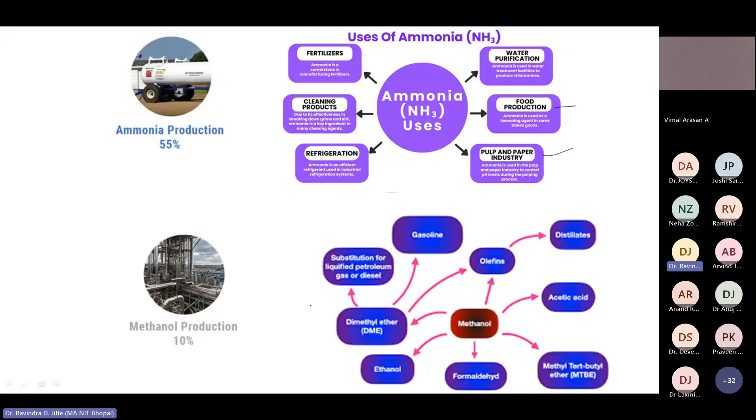The second 10% of hydrogen is also required for methanol, and methanol consumption includes producing acetic acids, distillates, ethanol, or DME, and so many other applications. This will just briefly give you the idea that there are requirements of hydrogen by industry, and industry is not a single industry like petroleum—it has got a wide variety of industries.

Now if we go through the present classification of hydrogen based on the way it gets produced—the majority of hydrogen which is at present required by industry, we call it gray hydrogen. It is produced by simply steam reforming of methane, which we call SMR. It is gray hydrogen, but at present we are fulfilling the need of the industry with it.

Maybe we are compromising on the pollution point of view, or the environmental damages occurring by gray hydrogen. But the demand is there, so we cannot stop the industrialization or the growth of civilization. So needs are there, and at present majority of the hydrogen comes from gray hydrogen.

If you look at the topic, this FDP is about green hydrogen, and that too should come from sustainable sources. So there has to be a clear picture about gray hydrogen, blue hydrogen, and green hydrogen.

In gray hydrogen, we take natural gas, or CH4, and carry out the reforming of CH4. Hydrogen can be produced, but at the cost of liberating CO2. If this liberated carbon dioxide is not captured or sequestered, then this is called gray hydrogen.

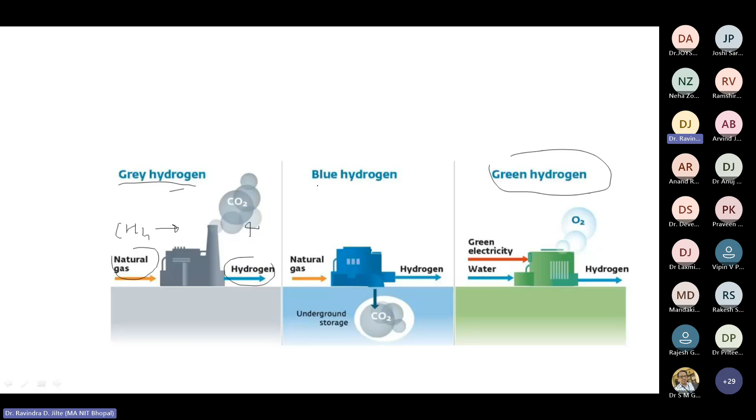Since there are international constraints, we have to follow certain conditions, like not liberating carbon dioxide to the atmosphere freely. So in a second approach, we still use reforming of CH4 to produce hydrogen, but we install carbon capture and storage methods in the plant. Once the carbon dioxide is captured, we store it in a place where it won't cause environmental damage.

In underground storage, under the sea or oceans, we have found abundant reservoirs, empty spaces where we can put this CO2. That is one way of doing it, and this is called blue hydrogen. But here, for converting natural gas to hydrogen, we require fossil fuel.

Now, if you try to replace this fossil fuel with renewable energy, it is called green hydrogen. In the case of green hydrogen, we carry out electrolysis of water, and once that is done, we get hydrogen, and as a byproduct, we get oxygen.

But electrolysis is an energy intensive process, requiring electricity. If this electricity can be provided in a sustainable or green way, for example using a PV plant to provide electricity, that concept is called green hydrogen.

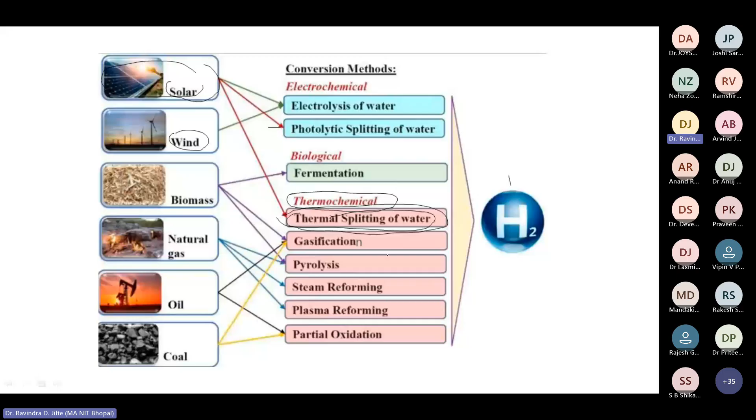Then the concept called solar fuels. Now solar fuels is basically, suppose the diesel is not available, or kerosene is not available, then how will you fly the aeroplane and carry out other activities? Can you produce the jet fuel artificially in the laboratory? That is what is happening over there, because many activities deal with the diesel engine, kerosene, petrol, or so many other things.

So what we try to do is, if you can produce some kind of hydrogen in a laboratory condition, or some kind of syngas, which is the mixture of CO plus H2, then under certain processes we can pass this syngas to produce synthetic diesel, synthetic kerosene, or synthetic fuels. Since we are utilizing solar heat to carry out these processes for generating the hydrogen, or for splitting the CO or syngas, here we are utilizing solar energy. Since it is an energy intensive process, the fuel it produces, like synthetic diesel, is called a solar fuel.

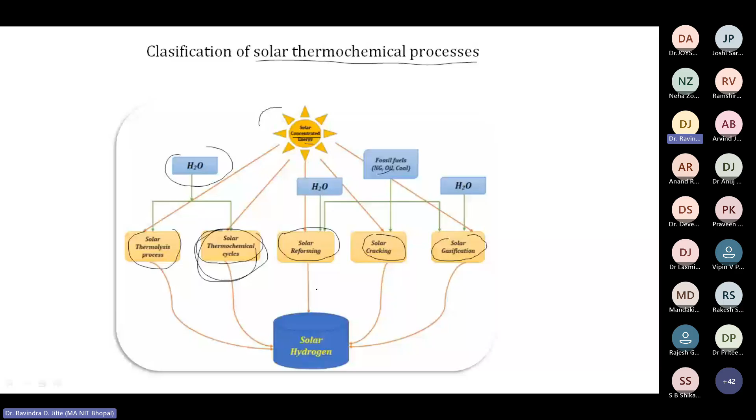But as I mentioned, we'll be discussing only one pathway. Before we discuss this part, we require the concentrated energy.

We'll review the options of producing concentrated heat. Mostly we'll utilize the parabolic dish kind of concentrator or heliostat kind of concentrator where high temperature is possible. Among these, the parabolic trough collectors are available, or the heliostat tower arrangement, or the CPC kind of collectors or receivers, and then the parabolic dish.

So we'll be utilizing the systems where the concentration ratio is higher. It depends on the concentration ratio.

Now a little understanding is required here because in our case, when we carry out the reactions, two steps are involved. Certain temperature is required for one step and another level of temperature is required for the second step. So we'll have to adjust our concentration ratio, or at least design the solar thermochemical reactors keeping that temperature in mind. We should also know what concentration ratio is required to generate that level of temperature.

So I hope you have enough idea about the concentration ratio. At present I am just specifying the concept here, which will be part of discussion and utilization in our upcoming slides.

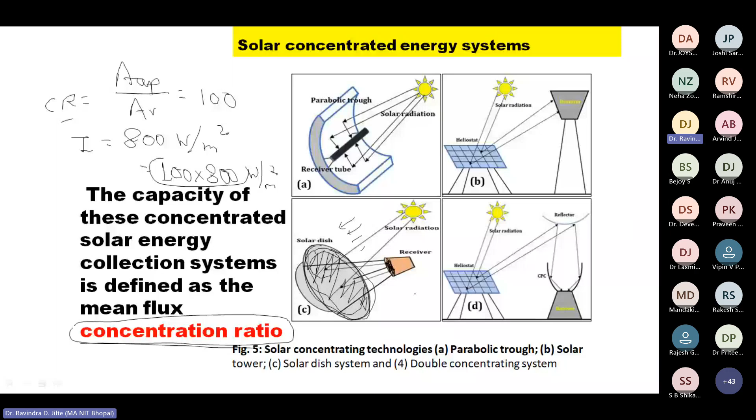Typically, solar towers can be in the range of 300 to 1500 concentration ratio, and temperature can be up to 1500 Kelvin. If you take solar dish arrangements, concentration ratio can be in the range of 1000 to 5000, and temperature can be in the range of 1800 to 2000 Kelvin. So higher temperature is possible in case of solar parabolic dish systems as well as solar tower systems, which is displayed on the screen.

Then for the solar thermochemical processes, as I mentioned in the previous classifications, we'll be utilizing in our discussion metal oxides, like cerium oxide, and specifically non-volatile metal oxides. In non-volatile metal oxides, our discussion will be purely on ceria-based redox reaction. So these are the pathways of our discussion for today's FDP.

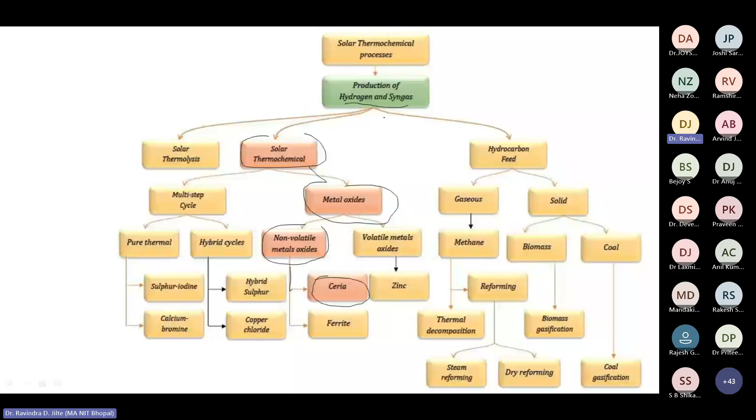Although there are other options for producing hydrogen as well as syngas, the topic here is only about generating hydrogen in a sustainable manner. But since we are also discussing solar fuels, the syngas form utilizes these pathways to produce solar fuels. These are the common pathways available.

So the first process, if you look at thermolysis. Now why is this required to be discussed? Because we have the equivalent process called electrolysis. If you provide electricity, you call it electrolysis, and equivalently, if you provide solar heat, we can call it solar thermolysis.

Now the question is that electrolysis of water for producing hydrogen is almost universally utilized nowadays, but solar thermolysis is not popular. So what's the reason there? Somebody may be thinking simply provide the heat by solar and try to split it. But here is the idea.

The concept of solar thermolysis is to dissociate water molecules to produce hydrogen by supplying solar heat. But it demands a very high operational temperature, up to the range of 4300 Kelvin, which is required for water dissociation.

Since we have the technology we just discussed, wherein we are limited by temperature, like 2000 Kelvin or in the range of 1800 or so, whatever solar heat is available or will be available will not be sufficient to generate that much temperature. So we have dropped this idea of producing hydrogen by solar thermolysis. This is one drawback we can say.

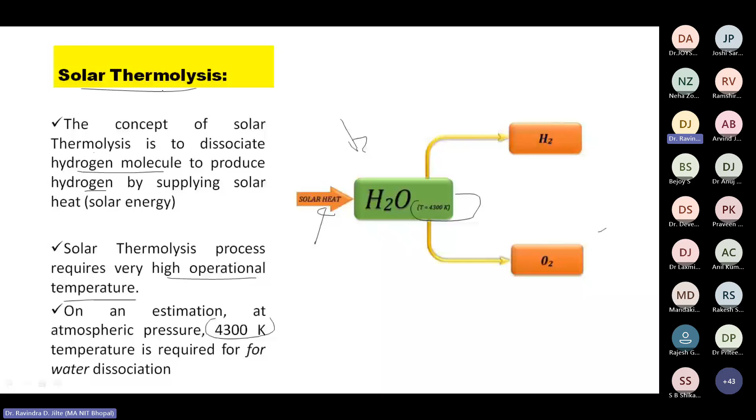Then another question arises. Solar thermochemical cycles are used to counter two problems related to thermolysis, that is, to take care of the two problems inherent in solar thermolysis. The first one is the separation of hydrogen and oxygen molecules, which might formulate an explosive mixture, so separation of hydrogen and oxygen is required. That is taken care of by the thermochemical cycles.

The second case is the requirement of high temperature, which is also taken care of by the thermochemical cycles, by carrying out the reactions at a lower temperature, which is possible to produce using conventional, or present-day, solar technologies. So solar thermochemical cycles can operate at a relatively low temperature compared to thermolysis.

While solar thermolysis produces hydrogen and oxygen in a single step, thermochemical cycles produce H2 and O2 in two different cycles. So we have two different cycles, meaning we have redox kind of reactions, where reduction is one reaction and oxidation is another. Therefore we can get the liberation of hydrogen, and thus there is no challenge in separation. That is the advantage of discussing these thermochemical cycles.

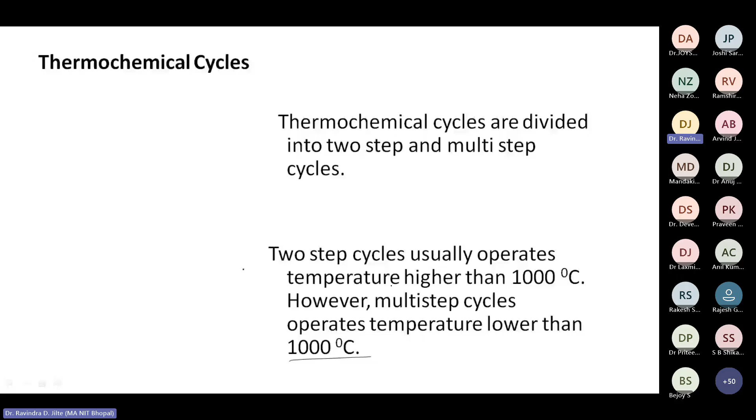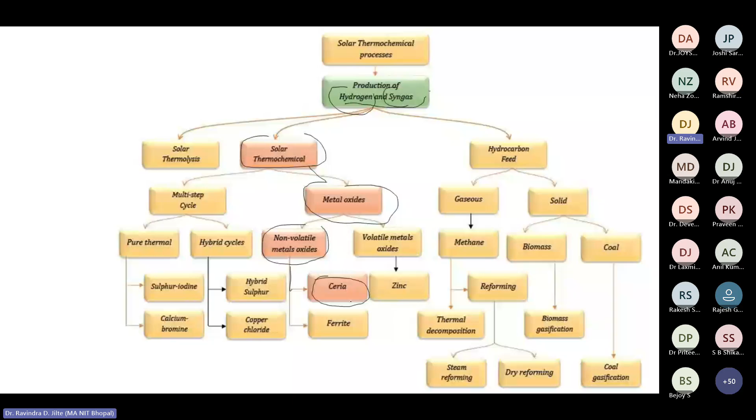So here is the justification, the advantages of having ceria in our reactions. Ceria has several properties. It makes a good oxygen carrier and redox material, with high oxygen storage capacity and exchange capacity. Ceria can store and exchange a large amount of oxygen.

Second, structural stability. Ceria can maintain its crystal structure over a wide range of oxygen non-stoichiometry. It also has fast kinetics during the redox process. Ceria exhibits non-stoichiometry, meaning it can release oxygen at higher temperature without changing phase. When we talk about non-volatile systems, we are adapting a process of reactions where the change of phase does not occur. This oxygen release is reversible, allowing ceria to take up oxygen again at lower temperature. It's a cyclic process, so we need to continuously liberate the oxygen, and again reform the cerium oxide. Thermal stability is also very good, so it's a good choice.

Ceria also has oxygen ion conductivity. Its catalytic property makes it effective in the catalytic process. We also went through other materials like ferrites, and found that ceria is the best suitable candidate for our research and discussion. So we have conducted research on it.

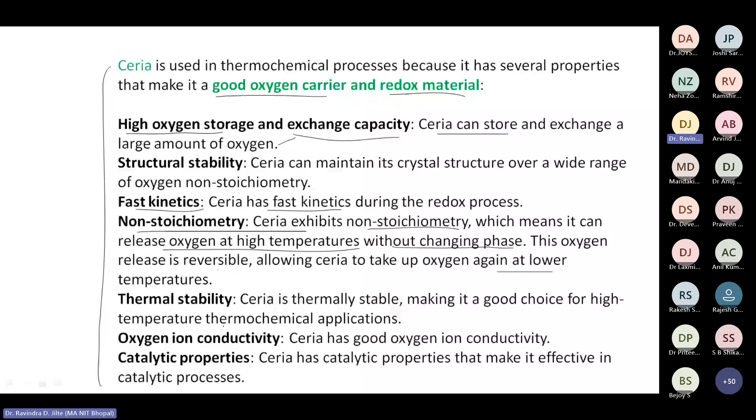Let us now look at the topic we are discussing. We have used ceria because we found that not many researchers have explored this area. To utilize this topic, we require the thermochemical solar reactor. So in today's discussion, we'll try to discuss mainly how to design and develop this solar thermochemical reactor, and lastly how to improve the solar to fuel efficiency.

So here is the process. The redox reaction occurs in two steps. In the first step, called thermal reduction, oxygen is produced. For thermal reduction, we expose cerium oxide to heat, which requires high temperature. Through this high temperature reduction reaction, we dissociate cerium oxide, and in turn it produces oxygen, leaving a reduced form of cerium oxide where oxygen is liberated. Now we try to provide steam.

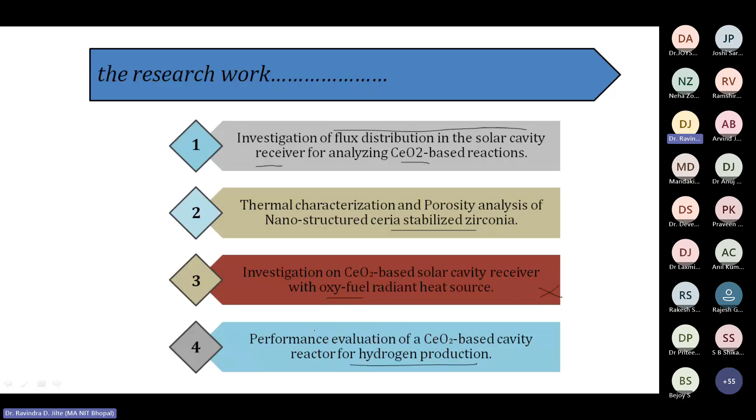Performance evaluation has been carried out in terms of efficiency. The methodology we'll be discussing uses a numerical approach to design the solar reactors. For that, we'll first analyze the solar flux.

Solar flux will help us provide the values of temperature distribution in the cavity. We require two ranges of temperature to carry out the reduction and the oxidation, and that will come from the solar flux. So initially we'll analyze the solar flux, then the temperature distribution.

Then we'll also try to modify the shape of the cavity and the aperture diameter. We call this geometrical parametric analysis, to identify the best shape for solar thermochemical applications. But prior to that, we also carry out material characterization.

Experimentally, scanning electron microscopy is used to analyze the zirconia coating on the cavity. Lastly, we'll demonstrate hydrogen production through numerical techniques, and we also provide a few slides on efficiency analysis. This is the layout of the presentation.

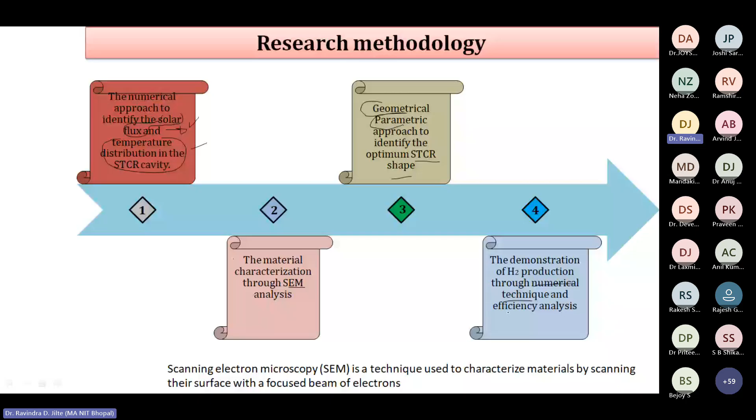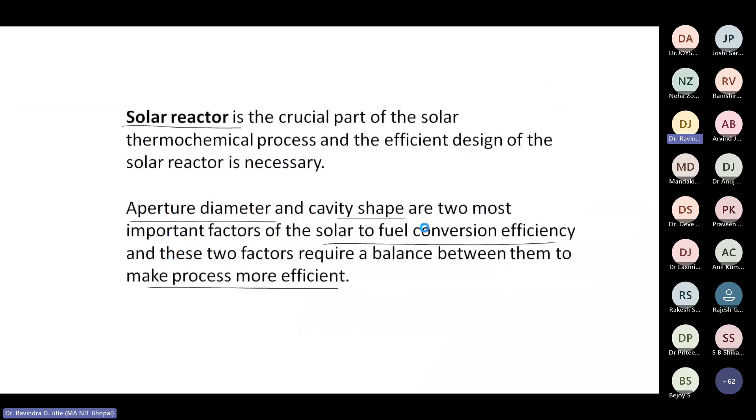Now this inert gas will try to sift out the oxygen which forms. If you look at the previous reactions, in one process we get liberation of oxygen. This oxygen has to be taken out of the cavity receiver. So somewhere when this liberation of oxygen occurs, the reduction of CeO2 to CeO(2-x) happens, and this oxygen will be taken out from the cavity receiver with the help of inert gas. That is the use of inert gas, apart from maintaining the partial pressure.

So typically what we have done is used the Monte Carlo ray tracing technique. Now you can use your own - there are so many softwares available that work on Monte Carlo ray tracing techniques. One such software we call SolTrace. We'll discuss that also. So what is the solution algorithm we adapted?

We adapted the solution algorithm in two ways, because we wanted to carry out the optical as well as the thermal analysis. The thermal aspects we have studied with the help of CFD - ANSYS CFD we have utilized for the thermal analysis, and for optical analysis we have utilized Soltrace software, that is MCRT. In MCRT analysis, we need to specify the sun shape, the direction, the optical parameters, and we need to obtain the flux distribution.

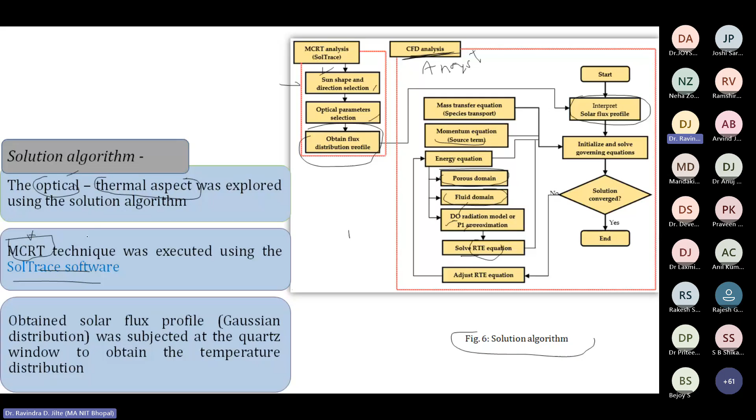But let us look at this - I will try to keep it simple. Soltrace is utilized to carry out this Monte Carlo analysis. As I mentioned, there are multiple such softwares available, but one which is freely available from NREL is Soltrace. You can visit the website and download this software for the flux distribution. We have also done the same thing since it is freely available.

This requires some steps. So I will give the idea - we need to define the sun shape, the directions, and we need to define the input properties, the optical properties. For example, in optical properties, you can assume the reflectivity of the surface.

You can also assume the slope errors. For example, here the solar parabolic dish is there, so basically two elements are there. This is step one, and this is step two. So we have to define the system geometry, define the stages, and define the components in a stage. For example, we have the parabolic concentrator, and in a second component we have the receiver, the absorber tubes, and so many things are there, along with the choice of the number of rays to be traced, and we have to extract the results.

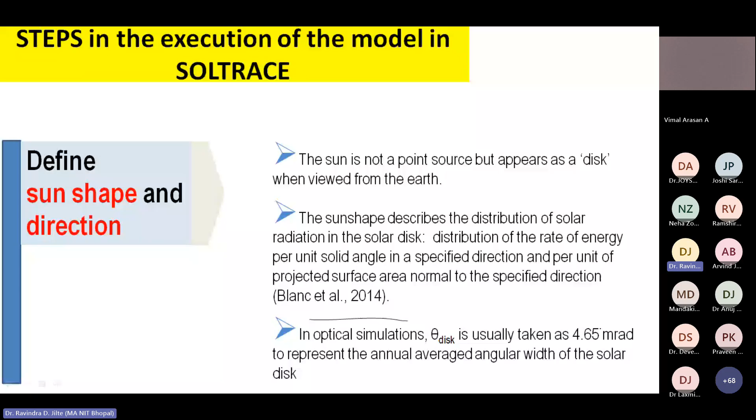We need to define the sun shape and the directions. In the literature, we find the sun shape that can be taken for optical simulation, and the best shape can be based on the solid angle. Two options are available in the literature, and in the software we have three options, but one is user defined. Normally we choose either the Gaussian distribution of the sun shape, or the pillbox kind of distribution.

For our analysis we have created the Gaussian distribution. So these are the steps. Then, as I mentioned, this software also allows us to input the optical property. We normally try to provide the optical property in terms of emissivity, or in terms of reflectivity and absorptivity. So all this optical property can be easily fed into the software.

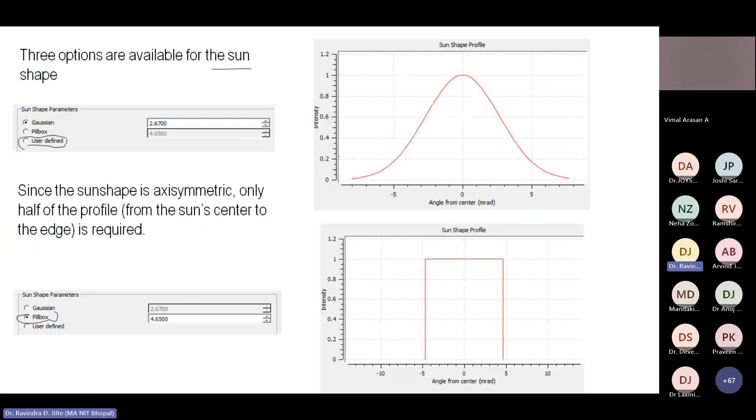Now let us come back to the discussion. I will go back to this case. This is our analysis where we wanted to analyze the effect of flux distribution. Suppose this is the focal point. If you place the reactor exactly on the focal point, what is the flux distribution?

If you try to shift its location, what will be the flux distribution? We have studied this effect, taking two cases as drawn here. In one case, we have kept the focal cavity at the focal point. This is the focal point, and this is the parabolic dish. In the first case, we kept it at the focal point, and in the second case, we kept the focal point cavity 20 millimeters inside.

So this is the two cases, case one and case two. In both cases, this parabolic dish has a slope error which varied. So the effect of having different kinds of slope errors, for both case one and case two, we explored using the discrete ordinate radiation model.

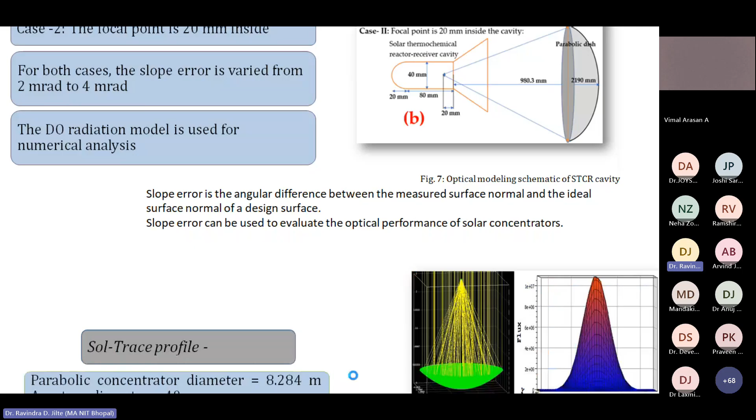Slope error is the angular difference between the measured surface normal and the ideal surface normal of a design surface, and it affects the optical performance. So here is the result we obtained from the SolTrace, the flux distribution we obtained for the parabolic dish, and now the question comes of the validity of the results.

So we try to utilize published studies from Zhang et al., and we found that the SolTrace simulation results we obtained match with the Zhang study as well as the Lee study. So the analysis can be further extended to formulate the temperature distribution, and this temperature distribution is essential to carry out the redox reaction. Redox reaction is the process we adapted for generating hydrogen. This is all the connected discussion we are having here.

So the solar flux distribution we obtained, we then try to analyze if the slope error is 2 milliradian or 4 milliradian, for case 1 and case 2, how the flux distribution occurs. We presented this analysis and found that when the slope error is 4 mrad, the flux value is higher than case 2 for both slope errors.

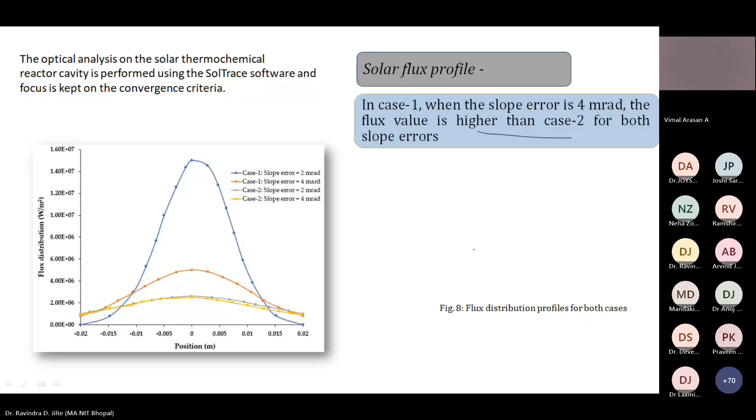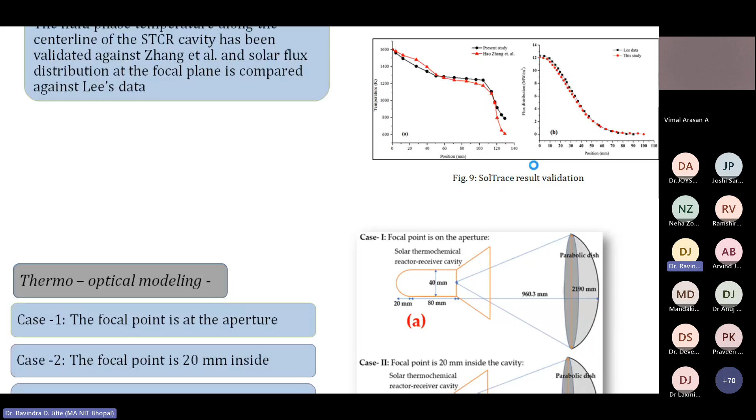Then comes the CFD analysis, because CFD analysis will give us the interior thermal picture, the temperature distribution inside the STCR cavity for the comparative slope errors. So whatever solar flux distribution we obtained, we took as an input. We have mentioned the entire pathway is available, so I will go back to that pathway. This is the case where whatever solar flux profile we obtained, we try to utilize now in the CFD analysis.

So in the CFD analysis, first we model this thermochemical cavity. This thermochemical cavity is modeled using ANSYS modeler.

We obtained the thermal analysis, that is the temperature distribution through CFD, done for both cases. We found that the temperature distribution inside the STCR, the solar thermochemical cavity reactor, with a slope error of 4 mrad is comparatively more uniform.

We wanted more uniform temperature distribution because our reactions demand that all the areas should undergo the same temperature exposure. So we wanted confirmation from the temperature distribution side, and we analyzed this case, comparing it with the second case as well.

We looked at the temperature profile in both cases for the cavity receiver, wanting the temperature distribution on this side and on that side. So in the radial direction, we obtained the temperature distribution along the radial direction in the porous media, since this is the RPC we are using.

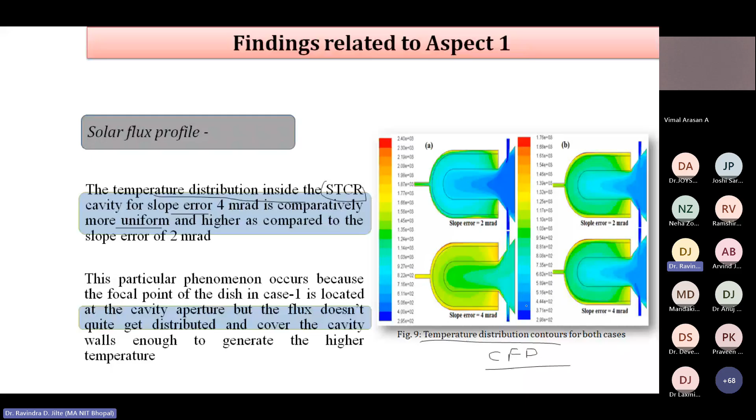Along the radial direction, we found that the temperature is higher for 2 mrad slope error as compared to 4 mrad slope error.

Then in the axial direction, temperature distribution is also what we required. We need both, because our production of hydrogen from water, as I mentioned, follows a two-step process, and the temperature requirement is different in each step.

We wanted to take water as the input and split it with the help of solar heat, rather than conventional electrolysis.

We are discussing a long-term kind of process, because in typical electrolysis you utilize electricity produced either from wind power or solar PV plants, and at present there are issues about recycling solar PV or its utilization after end of use, so that is not the long-term solution.

Today's discussion is about a long-term solution that the entire world's researchers are looking at. For short-term solutions, we produce hydrogen with electrolysis and call it green hydrogen, but that is not going to help in the long term. This is why we are adapting this process.

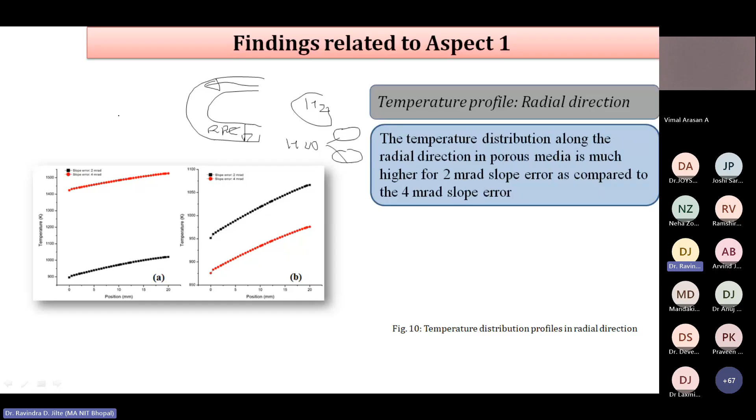In the temperature distribution, we analyzed the axial direction also, and found that for the 4 mrad case it's the highest temperature, and whatever temperature we expect, from 800 to 1600 or 2000, it is possible to reach, at this position in the direction.

If you look at the depth of the cavity, we obtain that at the aperture the flux distribution is higher, and the distribution of the flux makes the difference in the temperature inside the cavity in the axial direction also.

Then we analyzed the cavity length also. Along the cavity length we have the temperature distribution, and all this data which we can observe on screen is extracted from the CFD analysis.

Our understanding and exploration towards CFD needs to be widened, because it has so many opportunities and so many modules available. Chemical kinetics is one such module which we normally do not explore.

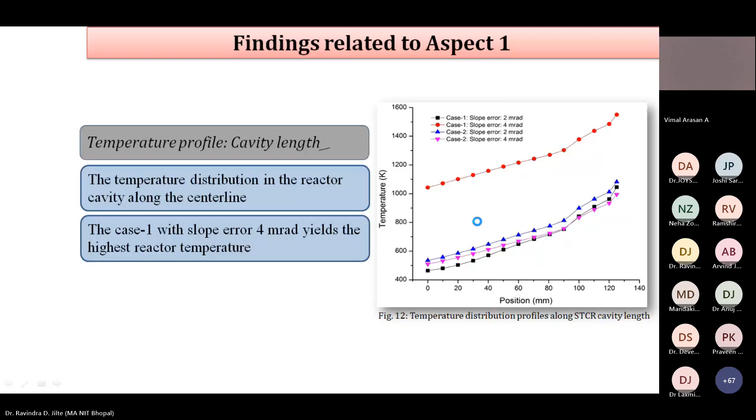Now the question arises, why is there this slope error, since very large optical sizing is required. If you take the concentrator, there will be a very large area, which we cannot make from a single mirror. We'll have a number of mirrors connected or stuck together, so there will be some surface error, which as such we cannot eliminate.

The second error is when we try to carry out the tracking of the sun, which may not be 100% accurate, so the rays may get deviated from the focal point. So a number of issues are there when we try to analyze the actual situation on the ground, and that is why we have taken the slope error into account.

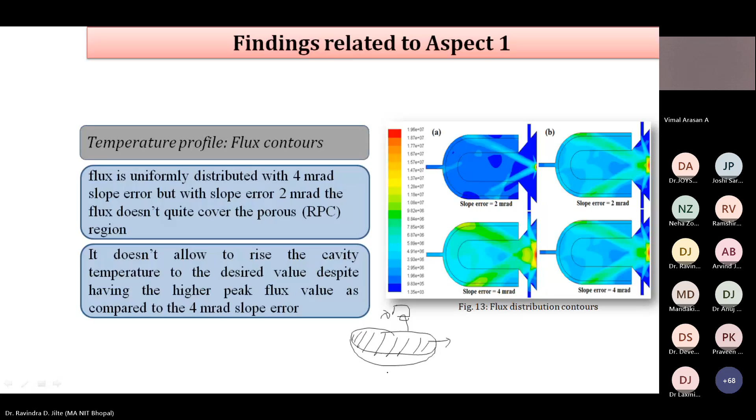Let us analyze this cavity reactor, made up of the cylindrical cavity and the hemispherical cavity. We wanted another option or exploration wherein the flux distribution and temperature distribution can be more uniform, so we changed the shape. With this, we obtained the flux distribution.

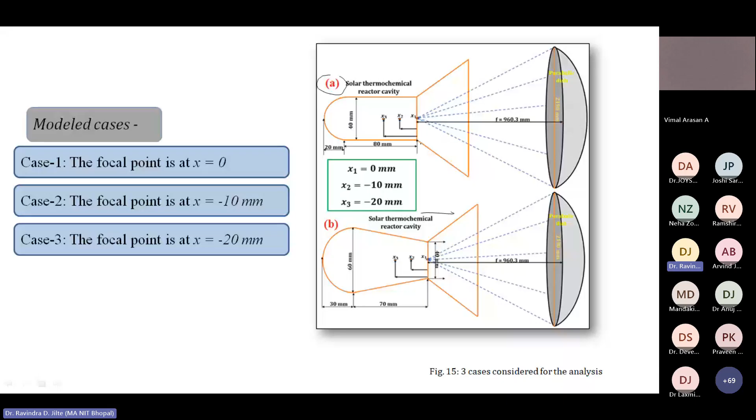In the second case also, we took two or three options, like case one: we took the focal point, then 10 millimeter inside, then 20 millimeter inside. We tried to carry out this cavity, which is this A cavity, compared with this B cavity. In the B cavity, a similar kind of exposure was given, and in both cases we obtained the flux distribution.

We compared the flux distribution. We followed a similar kind of approach because these results were already obtained previously. What we added here is this B part. We just modified the cavity and obtained the second set of results, then tried to compare with similar kinds of errors.

So we carried out the analysis, and we extracted again the same thing. As I mentioned, another case was there, apart from the temperature extraction in the radial and axial directions.

Later on, we also explored the thickness of the porous RPC. In all the analysis, as mentioned, we took a thickness of 20 millimeters. But later on, we also modified this 20 millimeter thickness.

In one of the analyses, we also tried to vary the orientation of the inlet, because this inert gas is used to sweep out the liberated oxygen. Since we are carrying out reactions to split the water, we wanted to explore changing the orientation as well.

What I'm trying to put forward is that when you initiate any research topic, try to think of the possible kinds of diverse analysis. Like here, we tried changing the shape, the positioning, the thickness of the RPC, and the thickness of the inert gas passage. So many things we have explored.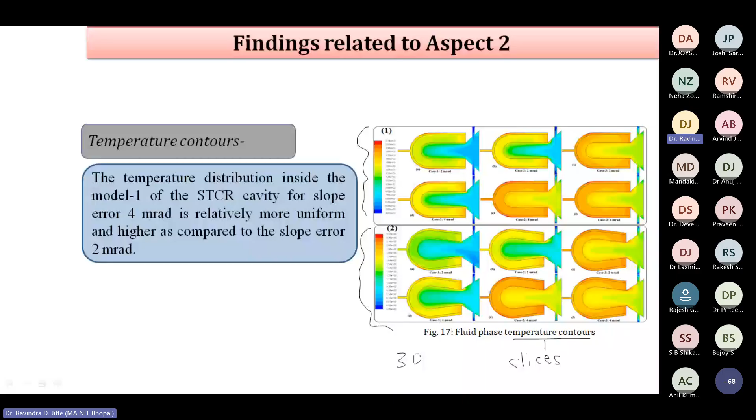In all our analyses, although it was very time consuming and a very time-intensive kind of simulation, we adapted 3D modeling only. If you look at this case, we adapted 3D modeling, which helps us because in 3D modeling we can take any slice.

If I take this slice, I can analyze the temperature distribution over here. If I take one slice, I can find the temperature distribution inside the RPC from this distance. Or if I take a second slice, I can find the temperature distribution at a different depth. So taking the three-dimensional kind of analysis helps us extract more detailed results.

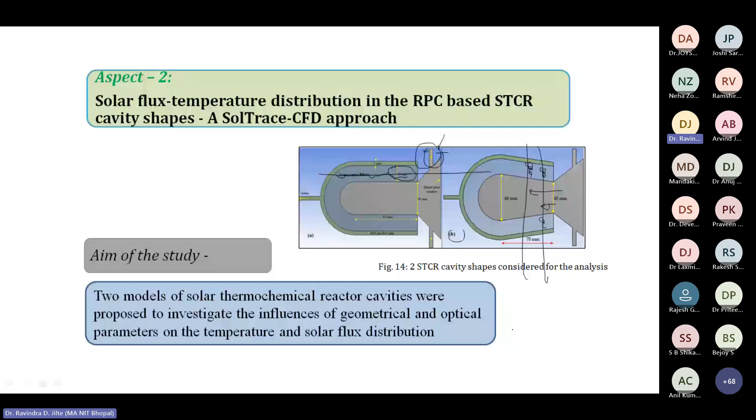So normally what we do is adopt 3D modeling, although it is very time consuming and also requires high-end machines. That is a constraint, but we try to adopt it anyway.

So second aspect, as I mentioned, was about the length, in the axial direction. In the axial direction, that effect also we have studied. Model 1 and model 2 detailed analysis we have extracted, and in our published results, because this is being published in a journal, we have analyzed and also extracted our own understanding, and we try to put it over there as a part of the inference from the graph, or inference from the analysis. So that we have done and present in the paper.

Due to the wider kind of audience who have joined this FDP, I will not go much deeper into exactly how we have extracted the things, but our main aim is there are several methods available to produce hydrogen in a renewable way, and there are so many other options and research opportunities available. So this is the main theme.

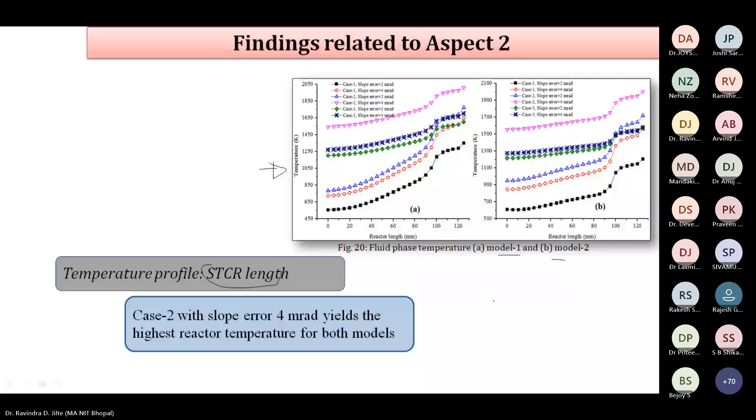Then flux profile, as I mentioned, we obtained the flux profile, and this was done just to achieve the uniform distribution. That is what is required, along with the temperature.

Then optical errors, as I mentioned, finding the average fluid temperature in the RPC, that is reticulated porous ceria, we obtained up to 1220 Kelvin and 1168 Kelvin for model 1 and model 2 respectively, for 2 mrad. 1500 Kelvin and 1510 Kelvin for 4 mrad slope error. So all this analysis we have carried out through simulation only.

And we also try to utilize how the velocity gets varied in model 1 as well as model 2, since internally the area or volume available to spread these reactions, or to expand this reaction, differs. We have compared model 1 and model 2, and we try to present the average fluid flux temperature, which we can say shows a difference.

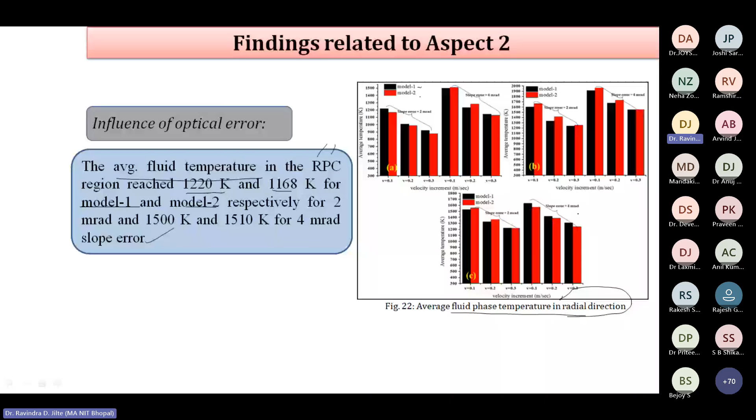So the shape of the thermochemical cavity reactors, as well as the slope, affects the fluid phase temperature in the radial direction. In the axial direction, that is -- previously it was the radial direction -- we obtained these results and found out that there is a difference. Similarly, in the axial direction also it contributes.

So the temperature range, if you look at over here, we extracted -- this we call a quantitative analysis. When we try to find out the exact values of the temperature, we call it a quantitative analysis. And previously, when we try to represent the results with the help of temperature contours, we call it a qualitative analysis. So qualitative analysis gives us a brief overview of the solution, but quantitative analysis gives us a detailed analysis.

So if you look at the detailed extraction of the temperature, we carried that out over here, along with the influence of the optical errors.

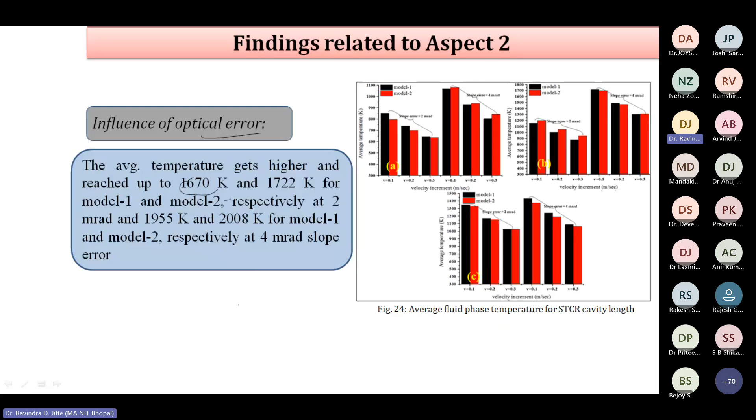Then if you look at the second case, as I mentioned, this is another aspect which we have carried out: the model of transport and chemical kinetics for water splitting. So here, this is the typical dimensions which we have utilized for the analysis.

The cylindrical arrangement length gives us 80 millimeters. As I mentioned, the 20 millimeter RPC varied from 15 millimeter to 25 millimeter. The gas flow gap is about 5 millimeter, which is also varied, and this inlet diameter also gets varied. So we carried out a complete parametric analysis to analyze the situation.

So here, a transparent quartz glass window is placed which allows the solar radiation to enter the cavity. The effect of RPC thickness and the gas flow gap on thermal performance has been investigated.

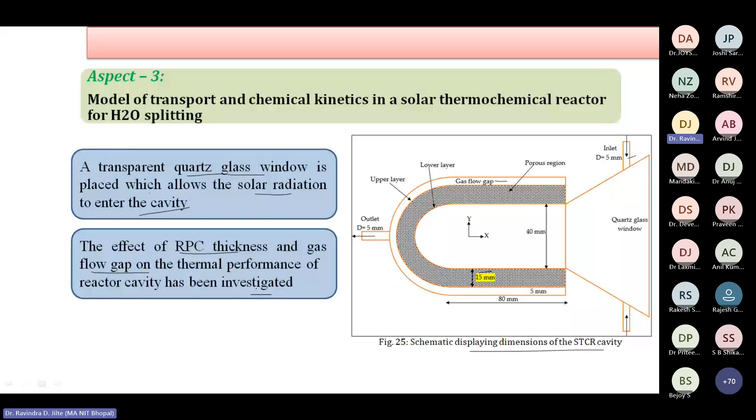So for the configuration, if you look at there, the RPC is 15 millimeter reticulated porous ceria, 20 millimeter, and 25 millimeter, whereas the inert gas flow gap is 5 millimeter, 5 millimeter, and 5 millimeter.

In a second attempt, we have increased the gap -- here it is mentioned, this is the gas flow gap. So the gas flow gap we have increased from 5 millimeter to 10 millimeter, and we have kept the same variation of RPC thickness: 15, 20, and 25. We obtained the results of this analysis through numerical simulation, which also means we have utilized CFD.

When you try to present the numerical results, you have to be very sure that your results no longer depend on the grid. For example, in a typical situation like here, when you try to model and mesh this kind of cavity, you can have X amount of nodes or X amount of elements there. But if you have Y amount of elements, your result should not vary.

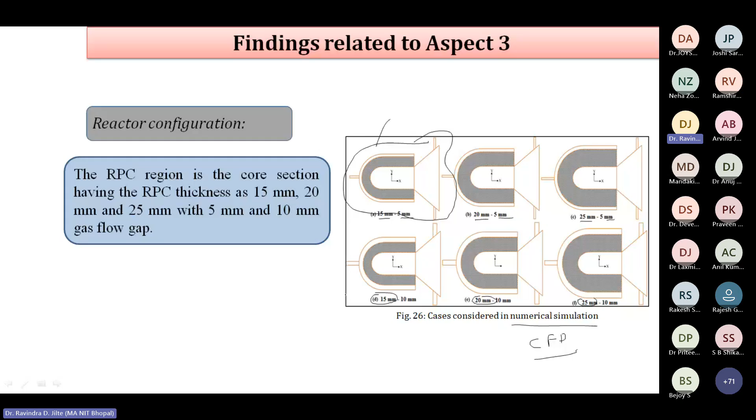When you have X amount of grids or elements over there and Y amount of elements over there, results should be the same, so you try to vary the number of nodes. The question is why this analysis is required - because increasing the number of nodes demands a higher processor and higher simulation time. So somewhere we have to compromise, but we cannot compromise on the results, only on the timing. For that case, we carry out the grid independent analysis, which we have done.

This is about when we try to increase the flow gap from 5 millimeter to 10 millimeter, how the results got varied. Those results are presented over here.

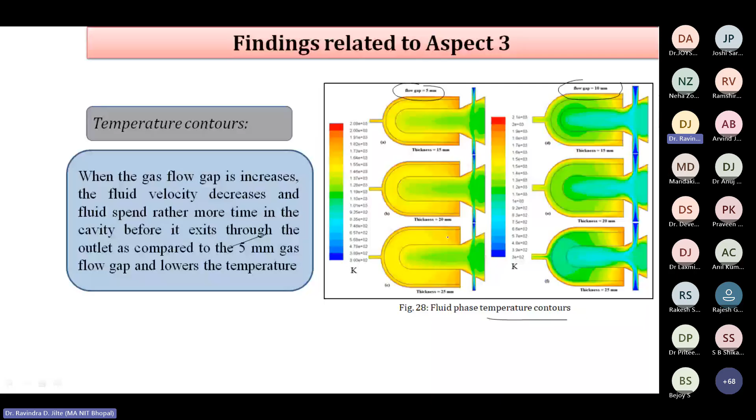Then in the third aspect, we obtained the quantitative analysis. This is the qualitative temperature contours. From that, we extracted the results and plotted the actual values of temperature distributions from all cases. We also took the RPC thickness, which we varied, so the gap effect we analyzed in detail.

We obtained certain conclusions from this. For example, increasing the thickness of the RPC zone combined with the content gas flow gap leads to a decrease in the average fluid temperature. So there is no meaning in simply putting more and more RPC - there has to be some optimal thickness of the RPC, which we found from the analysis. Otherwise, when you try to carry out the redox reactions, there will be incomplete liberation or incomplete reduction to the reduced CeO2. So all these things we need to analyze before we invoke any kind of reactions.

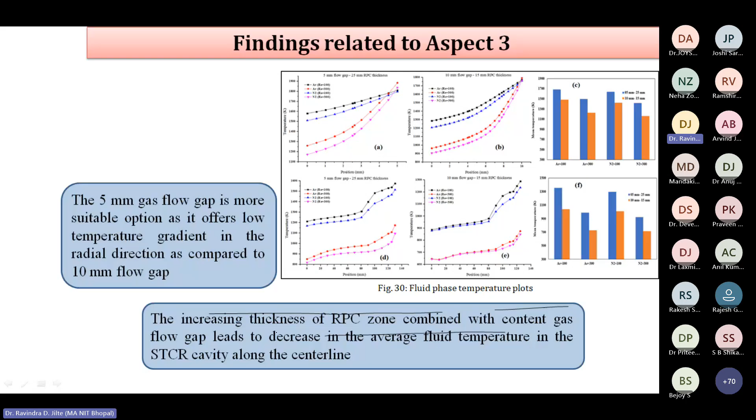As I mentioned, we also obtained results from 15 millimeter to 20 millimeter to 25 millimeter of RPC. Whatever vortex gets formed, we obtained at 15 millimeter, which gets a dead zone close to the porous region obtained over there. So radial radiative transfer path for incident radiation becomes the strongest factor to influence the uniform flux distribution. That is what we inferred from the contours.

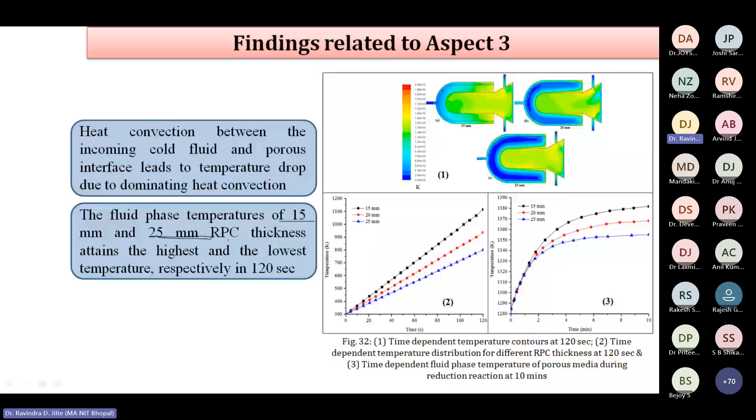This is another result for the 25 millimeter, from 15 to 25, the comparison is displayed. Again, if the RPC zone is exposed to higher temperature, it tends to reach peak values of oxygen concentration. So we took that 15 millimeter compared with 20 and 25. So molar fraction contours of the oxygen we have also obtained.

Because if you look at and recall from our previous slides, the liberation of the oxygen indirectly gives us the values about the reduction, that is CeO2 minus X.

Solar to fuel efficiency we obtained by the analysis of 15 millimeter, 20 millimeter, and 25 millimeter RPC, and up to 16.18% is what we obtained for the case.

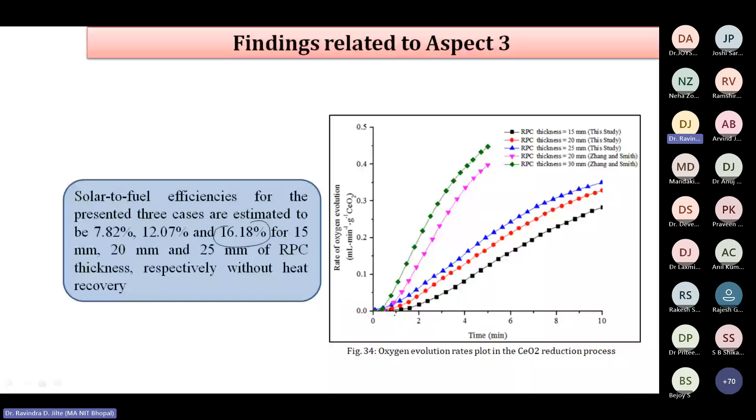Now another case - as I mentioned, we also wanted to study the positioning and orientation effect. Here we are allowing the inert gas to enter this way, which is used to sweep the oxygen and maintain the partial pressure over there. So if you have the inclination of the inlet, what is the effect? If you have another inclination of the inlet, what is the effect? Keeping the same RPC thickness, keeping the same inert flow gap.

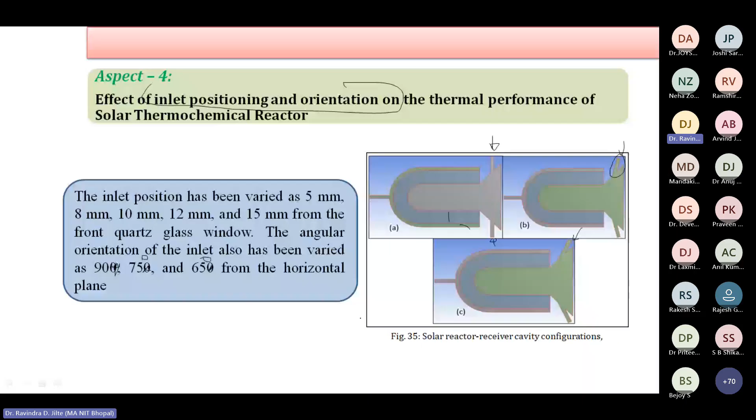So this we obtained at 90 degree, 75 degree, and 65 degree - this is the degree measured only from the horizontal. The subscript got mixed with the numbers, but it is 90 degree, 75 degree, and 65 degree.

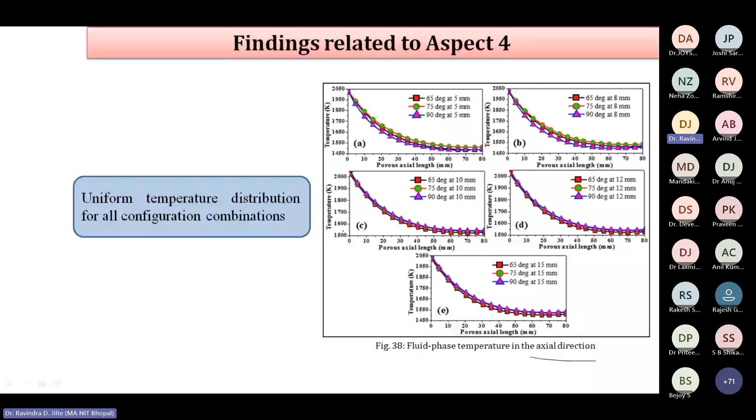So for this effect we obtained values like 65, 75, and 90. We analyzed the fluid phase temperature distribution, extracting results in the axial direction as well as in the x-z directions. All these were displayed through the CFD analysis. We commented on the uniform temperature distribution for the 5 millimeter, 10 millimeter, 12 millimeter, and 8 millimeter cases, across the length of the cavity.

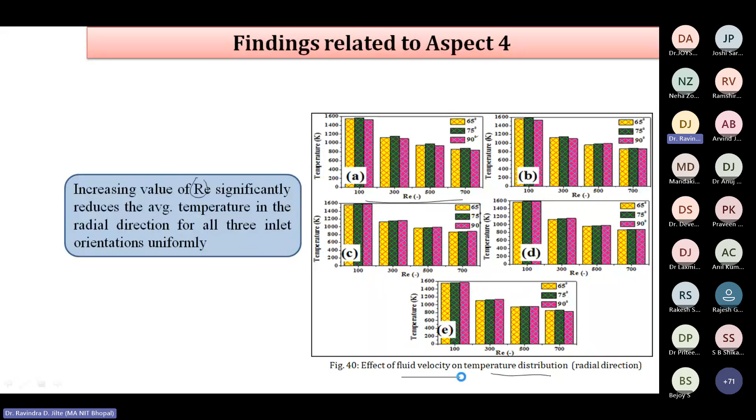We also studied the effect of Reynolds number, that is the velocity values, since we have options for providing different flow gas velocities. So we varied the Reynolds number and obtained results on temperature distribution. The effect of fluid velocity was obtained in both radial and axial directions, and we compared the temperature distribution with variation in fluid velocity.

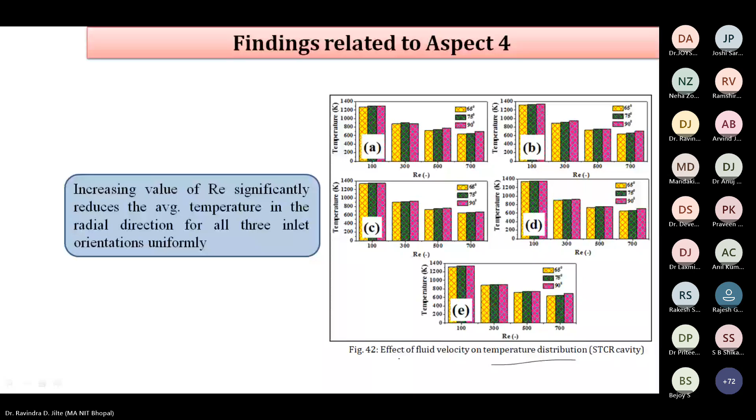Then there's another aspect. We lastly took two cases of reduction, like CeO2 getting reduced - earlier we had CeO2, then 2 minus X, since the original CeO2 is there. So when exposed to solar radiation, in one step we try to liberate the oxygen. How much oxygen is liberated? If you liberate from 2 to make it 1.72, or in the second case let us make it 1.83, you're liberating a certain fraction of oxygen. This analysis was separately carried out using the HSC chemistry software.

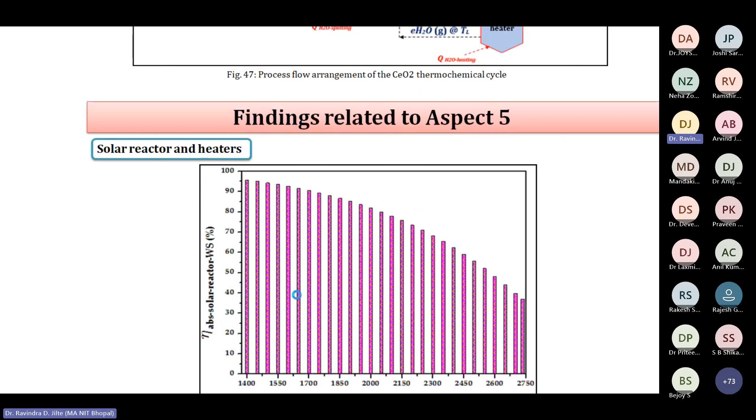Since time constraint is there, I will not be discussing this particular aspect. But this was also studied and analyzed in detail. I'm just displaying the results because so many complications are involved, which is beyond the scope of today's presentation. But many analyses are required to obtain and conclude on the results of hydrogen generation, hydrogen production from the thermochemical process.

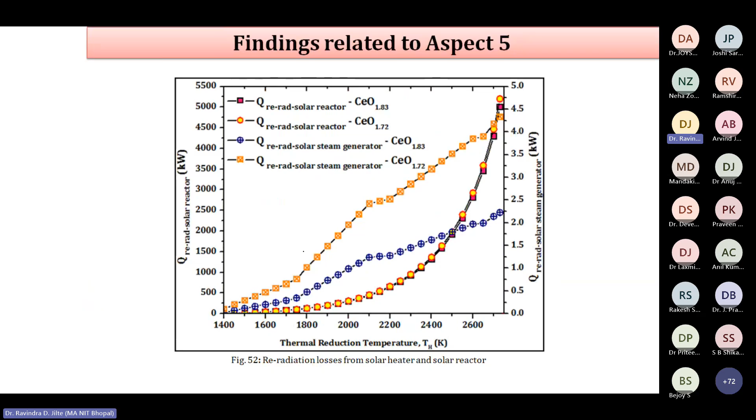I'll just skip this portion of the last aspect, but I will note that all this analysis has been carried out. We call it the last aspect, but get motivated by looking at these graphs - detailed research is required. If you look over there, we wanted to compare this case. So solar-to-fuel efficiency was also obtained for this case as well as for the second case.

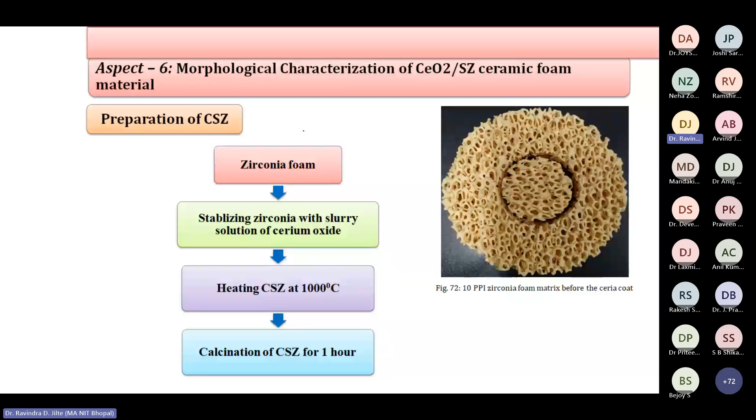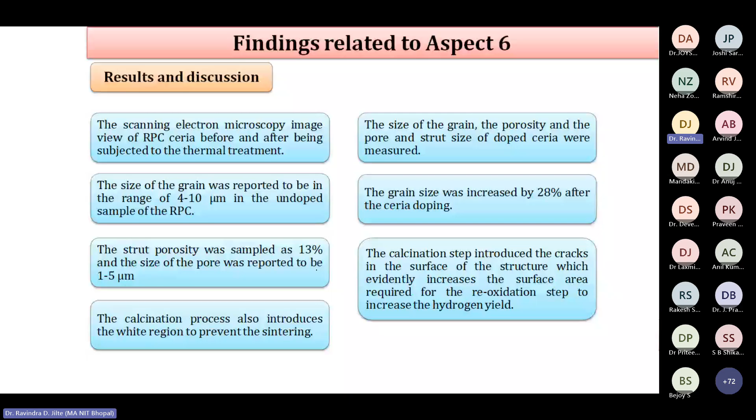And this is what I briefly specified last - the same analysis we carried out for zirconia. In addition, these are the results for the RPC foam structure, all obtained through this analysis. This gives us this kind of interpretation, which is possible, and we published it in a journal paper.

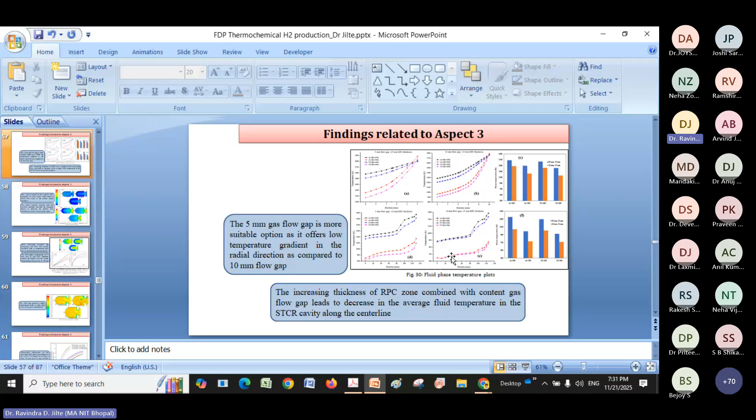If you have the licensed version of ANSYS, you can go ahead with the CFD. Third software also available is the HSC software, a chemistry software. But if you are into the chemistry side or chemical kinetics, then you can go for that kind of analysis.

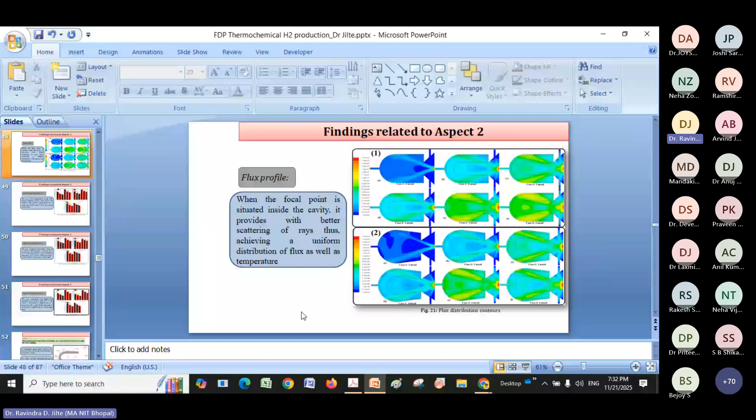Otherwise, there are three or four aspects of the research. One aspect is optical analysis with the SolTrace, which is available. Second is thermal analysis with the help of CFD software, which nowadays is available as part of institute software like ANSYS. Third is also available, like chemistry software. So all the software may not be required at this point. If you have just entered into this area of analysis, I will suggest you restrict yourself to CFD, ANSYS, and the SolTrace.

Okay, sir. Thank you so much, sir.

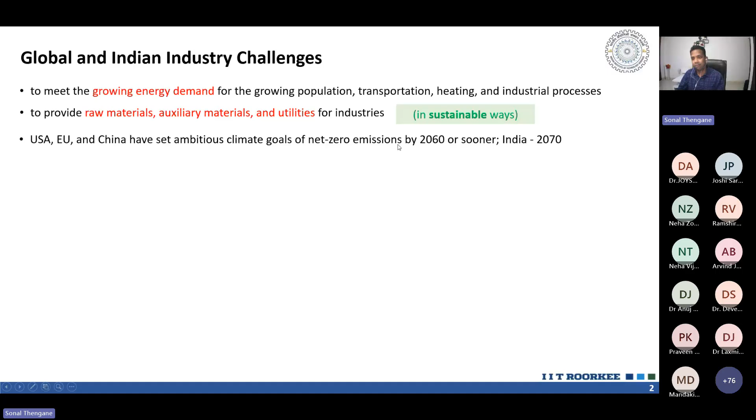India was way behind so far as the industrial revolution was concerned, but so far as contributing to NDC, the nationally determined contributions towards global climate change, we are very much in a competitive space with other developed economies in the world. So that is 2070.

So when we have these challenges in front of us, do we have solutions to it? Yes, of course, there are multiple solutions. One of the leading solutions is to go for alternative fuels and renewable energy, because most of the emissions are coming from fossil fuels. So the alternative to fossil fuels is renewables.

But then there is something called carbon capture utilization and storage, or low carbon or negative emission technology. This CCUS is a very wonderful thing, but it is not yet commercialized in many parts of the world, including India, because of cost concerns. Just imagine if capturing carbon dioxide from the atmosphere and storing it and using it for other purposes becomes very easy and economical, then we don't really need to worry about consumption of fossil fuels. That's why CCUS is a very interesting thing, and if it becomes economical and feasible at mass scale, it can reduce the load on renewables or renewable based policies, and we can continue to use fossil fuels at the same rate.

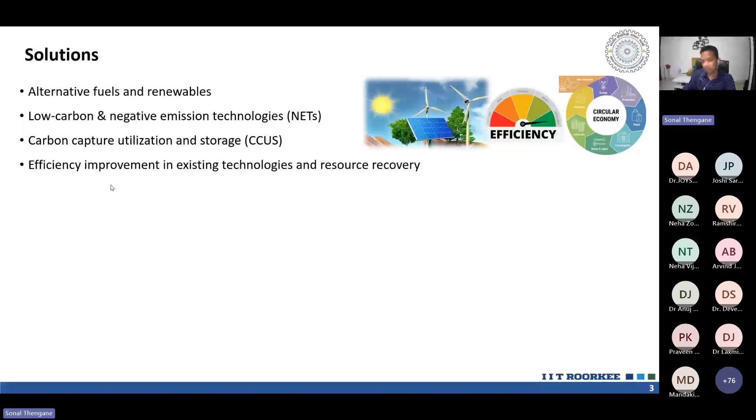So in all these solutions, the topic of today, biomass or waste, I find it to be special because biomass is also a renewable resource. But when we talk about other renewables like solar, wind, hydro, geothermal, each of these resources can satisfy our energy demand. Biomass or waste is the only thing which can satisfy not just energy but also a lot of material demands. We can make lots of materials, biochemicals, composites from biomass or waste, which otherwise are made from fossil fuels. That's why it is special, being categorized as a renewable energy resource, but it also can supply a lot of material alternatives to those which are otherwise obtained from plastic, metals, and other fossil sources. So that was about the specialty of biomass.

But then other thing about biomass is that it captures and stores atmospheric carbon. If you talk about biomass coming from forestry or agricultural sources, they are mostly plants and trees, which take a lot of CO2 while they are growing. And when they are burnt or used for energy purpose, it's actually the same CO2 which goes back into the atmosphere. Because of that biogenic carbon, the net carbon emissions for biomass-based technologies come out to be lower. Also, most of this biomass is available in the rural areas, so there is a huge potential for uplifting the rural economy if we come up with biomass-based technologies. And then there are versatile applications.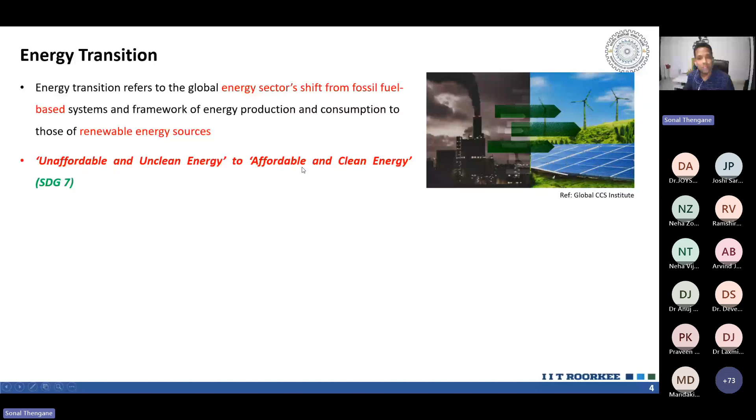So far as India is concerned, these three pillars of energy transition I would see in the area of power, that is grid, industries, and transportation. And this is where hydrogen is going to be very important. So when we say grid decarbonization, obviously it will be based on the power or the fuel mix in the power generation sector.

For industrial decarbonization, mainly the hard to abate sectors like cement, steel, chemical, and fertilizer, there are several avenues where energy could be provided by renewable resources, as well as material can be provided by energy resources. For example, in the steel industry, there is huge scope for utilization of hydrogen, not only as a source of fuel or energy, but also as a reducing agent.

Then in the fertilizer industry, we need urea, for which ammonia is one of the very good feedstocks, for which again hydrogen is a precursor. Then in chemical industries, for many chemicals, hydrogen can be used as an intermediate. So that's industrial decarbonization.

And in transport transition, there can be transition through different ways, like we can opt for public transport or better ways of living, like cycling, electric vehicles, hydrogen vehicles, and proper urban planning so as to fit public transport systems in there and avoid excessive traffic wait time or something like that, which ends up emitting lots of pollution.

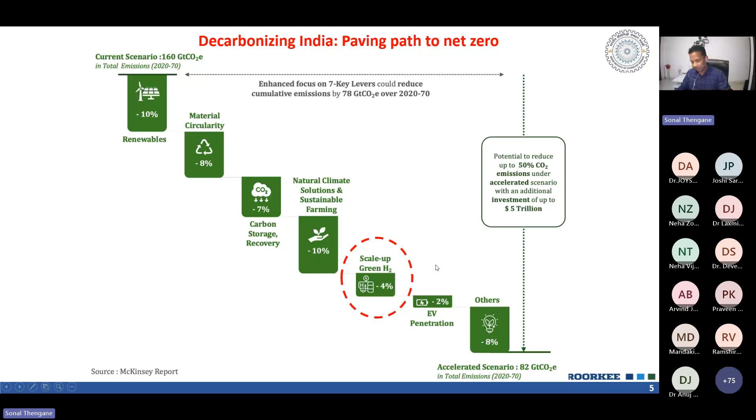So if you look at hydrogen production technology options, mainly from fossil resources, it comes either from coal, mainly through coal or biomass gasification, or from natural gas, through steam methane reforming, which produces most of the hydrogen in the world at present.

So for coal and fossil fuel based production, these are very well established industrial processes. They are relatively lower cost, and large scale commercial plants are already there, and these plants can be integrated with CCUS options.

Because once that mixed gas stream passes through a PSA column, like pressure swing adsorption, you get a stream of CO2 which is relatively pure, and that CO2 can be easily captured or considered for CCUS options for capturing and storing, but most of the time it is done by amine-based absorption systems.

And then there is huge potential for doing combined heat and hydrogen power production. So we have CHP plants, like combined heat and power; nowadays we talk about heat, hydrogen, and power.

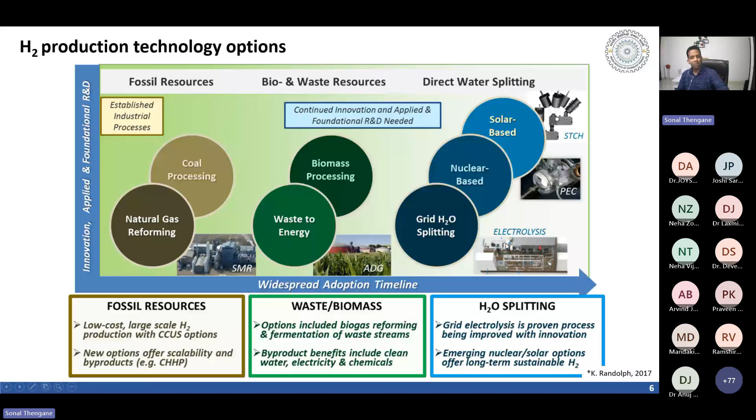So let's discuss, before biomass and waste, let's talk about some numbers. For 1 kg hydrogen, generally we need 12 to 20 kg of biomass. This is raw biomass, not dry biomass, so it may have 10 to 20% moisture. Then 25 to 35 kg of MSW.

These numbers are with respect to India, and 10 to 15 kg of RDF, so it's like one each. So if you have to produce hydrogen from biomass, it will need this much biomass for 1 kg hydrogen. MSW will need much more because of the high moisture content and high fraction of inerts in Indian MSW, and inerts won't contribute to any reactions.

RDF is a more sophisticated or processed form of MSW, where we take only the combustible fraction of MSW. So it will have a much higher calorific value, even higher than biomass in some cases. So we will need less amount of RDF for 1 kg of hydrogen.

And the process typically which I have considered here is gasification. So we can gasify biomass, we can gasify MSW, we can gasify RDF. These are some numbers on the carbon content or the cost. So at present, from biomass to hydrogen, the gross CO2 is around 20 kg. RDF is almost similar to biomass, and MSW is a little higher.

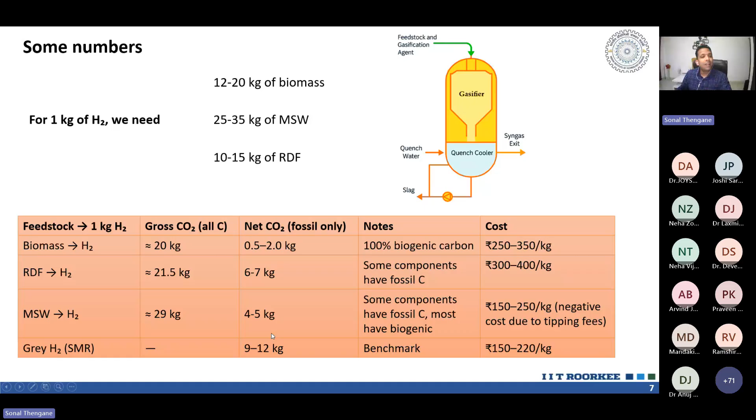Hence the only green hydrogen that we get is either from biomass or from electrolysis, where energy is coming mostly from renewables.

But again, with respect to biomass, there are other advantages, like it can come with CO2 capture. It reduces other issues of pollution. It can create rural incomes and jobs.

Same applies to waste also. India has more than 60 million tons of MSW per year. If waste could be managed for producing hydrogen or energy, it would create lots of jobs, and it would resolve other problems that otherwise originate because of mismanagement of that waste.

So when you look at the different types of hydrogen pathways and cost in India, I have given two costs: 2025 the current cost, and the projected ones for 2030 as per the National Green Hydrogen Mission cost. In the gray hydrogen area, it's mainly from steam methane reforming with natural gas.

The price is lowest at present, and that's why it's the industrially accepted process. The only factor here to control the price is the scale of economy, so the plant scale is important. Whichever country has huge amounts of purified natural gas can go for bigger plants of producing hydrogen.

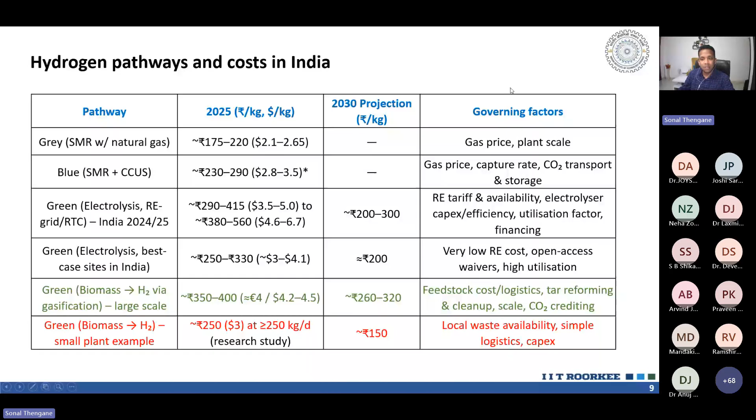Okay, so since we're talking about steam gasification of biomass, let me cover this slide, and then maybe we can take a break of 2 minutes if there are any questions, and then we'll continue further. So this is how the typical...

Gasification process looks like: you have biomass coming from different sources. It needs to be pre-treated. This can mean pelletizing, densifying in the form of briquettes, or simple drying if the moisture content is high and we need less moisture. So it can be drying, or particle reduction, shredding - it involves all sorts of pre-treatment. Nowadays, one very common pre-treatment is torrefaction, where we convert biomass into a charred powder, getting rid of moisture and some volatiles to get a charcoal-like product, because then it becomes very easy to mix it with coal and co-fire, or to use the same conveyors as coal conveyors in power plants.

And then that biomass goes to the gasification line, where we have the gasifying agent. The gasifying agent can be anything which contains oxygen - it can be air, pure oxygen, or steam. Steam, H2O, also has oxygen, and metal oxides can be used too. So any oxygen-containing species can be used as a gasifying agent. But if the objective is to produce hydrogen from biomass, the most preferred gasifying agent is steam, because steam helps in shifting the reaction towards hydrogen formation.

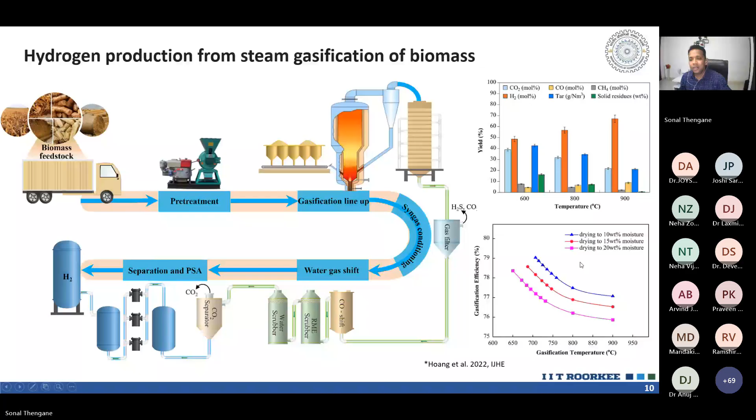Hello, yes sir, yes sir. Yeah, I'm audible? Yes sir. Okay, as if we are... hello, yeah please, hello, is it audible, sir? If there are any questions, please feel free to ask by unmuting, or you can write in the chat also. Hello, is it okay, audible sir? I have one question. Yes please.

In the carbon storage system that you mentioned earlier, the CCUS system, carbon capture use and storage system, I guess. Yes.

So it was stated that the carbon is stored and is used for different applications. May I know what applications this stored carbon is used for?

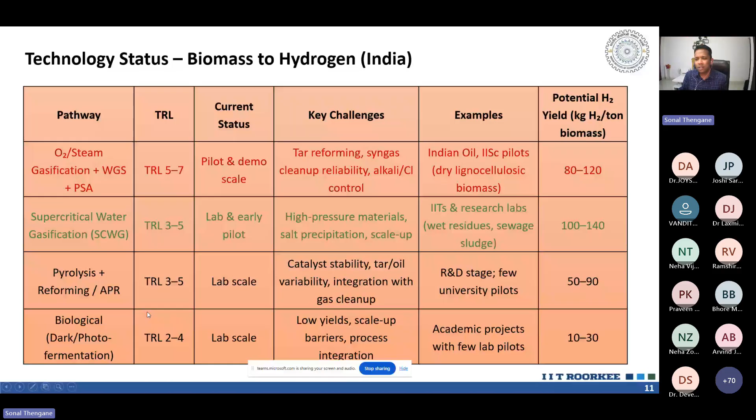Supercritical water gasification is again at a very early stage, but it needs high pressure, because when we use something at supercritical level, high pressure material increases the cost of the reactor substantially, and it is still at research level. About pyrolysis and reforming or dark fermentation biological processes, the yields are very low, and they are also at lab scale, giving even lower yield of hydrogen compared to other processes.

So the overall challenges with respect to biomass and waste is the feedstock supply and logistics, because of seasonal gaps, and there is high delivery cost, storage cost, and transportation cost. These are some recommendations for overcoming these challenges: we can have FPO contracts where bigger farms can store the biomass, or FPOs can store biomass collected from smaller farmers, or we can produce pellets and torrefy the biomass so it can be stored for a longer time and shipped at lower cost for longer distances.

Then there's the quality variability or heterogeneity - biomass or waste is highly heterogeneous. For example, even in the Pune Municipal Corporation, if you take the example of a landfill, the waste coming every day on that landfill won't be similar in composition.

Every day, the composition of waste would be varying, so we cannot design a plant over a very small range of composition. That composition of waste or biomass will depend on the season, because with the season and time of year, people's habits change. So the amount of waste as well as the quality of waste generated also changes. That quality variable is always there.

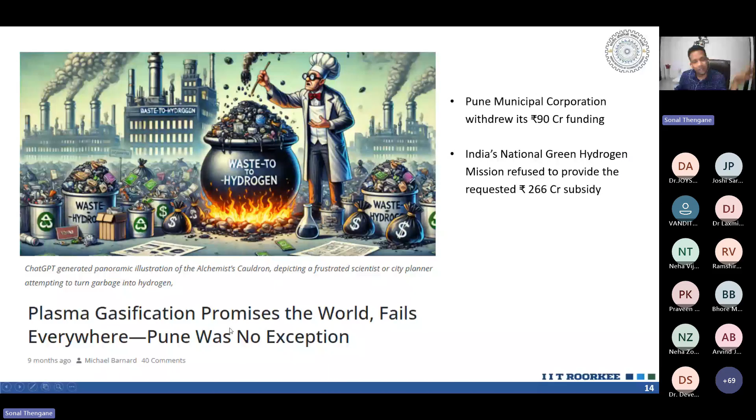Pune is not a metro city, but it's a tier 1 city, between tier 1 and tier 2 cities of India, and the MSW is huge in amount, and segregation is also possible in a city like Pune, Bangalore, Hyderabad. But plasma gasification plants for MSW or waste to hydrogen have failed in the best parts of the world also, so there's no surprise it failed in Pune.

So they just needed the gas from plasma gasification of MSW, but they had issues with feedstock variability. When you ask for such a big amount of feedstock daily, and it varies substantially in moisture content or biodegradable, organic or inorganic content, there will be a lot of technical issues handling and processing that feedstock, and the reactor won't give the same performance predicted using small lab scale reactors.

Because when we do research in our labs or even on simulations, we take a very refined, very clear feedstock. When I do research on municipal solid waste in my lab, I just take paper, plastic, cardboard, wash it, dry it in sun or oven, shred it into powder, and then put that feedstock in the gasifier or pyrolysis reactor, and then we do the measurements.

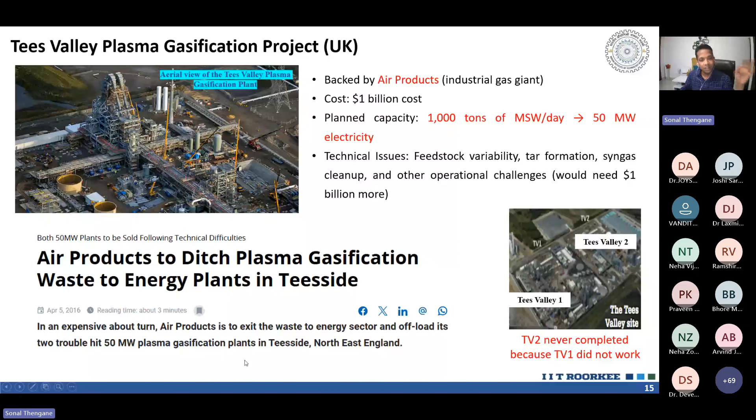They operated this for more than 15-20 years. It is still operational at 100 tons per day for MSW. But during these 15 years, they faced downtime many times, where the reactors and pipelines got choked and they had to halt operations. This area is not very big, and if a plant needs 100 tons of feedstock per day, they have to tie up with some municipality to supply that much feedstock every day. If there's downtime and the plant shuts down for 8 to 10 days, 800 tons of waste accumulates with nowhere to go. They would need extra storage, and that leads to huge costs.

Also, because this plasma reactor operates at more than 1000 to 1200 degrees Celsius, it needs a lot of cooling, requiring huge amounts of water. This township had issues with water, so the mayor did not allow huge water usage in these plants. When they tried to scale it up 3 times, they failed to get finance, because even at 100 tons per day, they could not show the plant was profitable. Finally, the company went bankrupt in 2015.

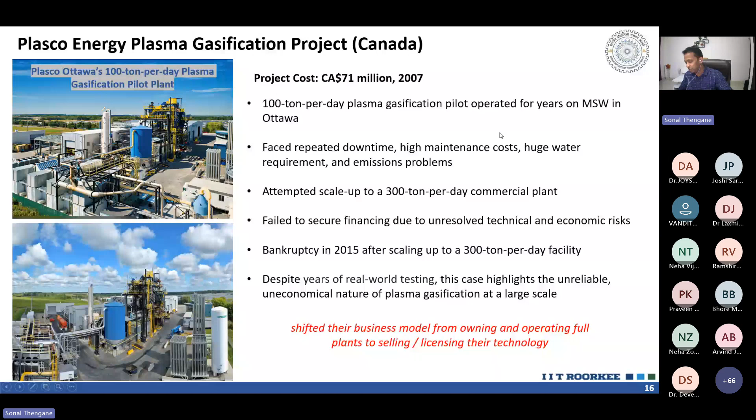So what now? If waste-to-energy or waste-to-hydrogen is not going to work, should we stop it, or is there another way? The examples we saw, including Pune, UK, or Canada, are all about plasma gasification or the gasification of MSW. But there are other ways to generate green hydrogen from biomass or waste.

One way is using waste plastics. When we say MSW or RDF, it includes a lot of things: paper, plastic, cardboard, food materials, stone, glass, rubber, and with this heterogeneity, it becomes very difficult. But plastic is a very good feedstock, the most common being polythene, polyethylene, and polypropylene.

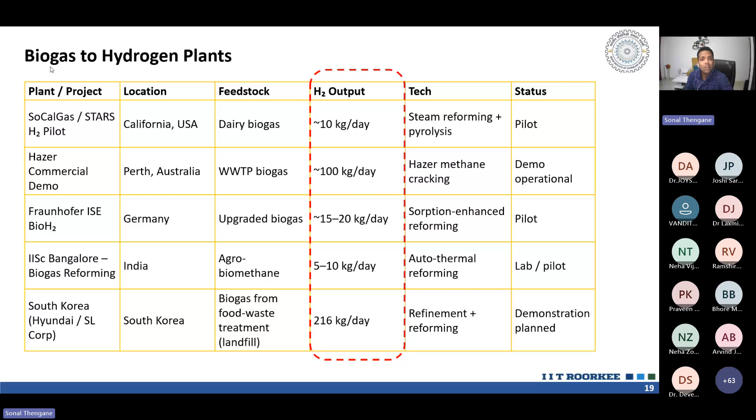So I think coming to the last slide, India's biomass and MSW potential as well as the national... Sir, you are not audible.

Hello. Yes, sir. Okay. Yeah.

And to start with, we don't need so many plants or big capacity plants. What we need is just bankable — meaning very thoroughly tested, technologically tested, 3 to 5 regional pilots of 25 to 100 tons per day with CO2 capture, reliable cleanup, and CO2 use. And if those work fine, then we can go for commercializing it at a bigger scale. But we should not be buying technology directly from foreign countries and putting it in India without doing our own pilot scale trials for our own feedstock.

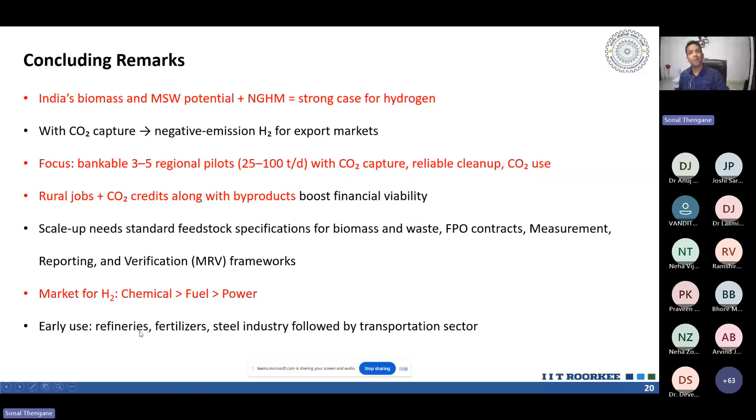Okay, so hydrogen should be used mainly for chemicals and fuel. Which means the earlier use would be in refineries, fertilizers, steel industry, followed by the transportation sector. So thank you so much. I'll stop here, and then if there are any questions, let's take it.